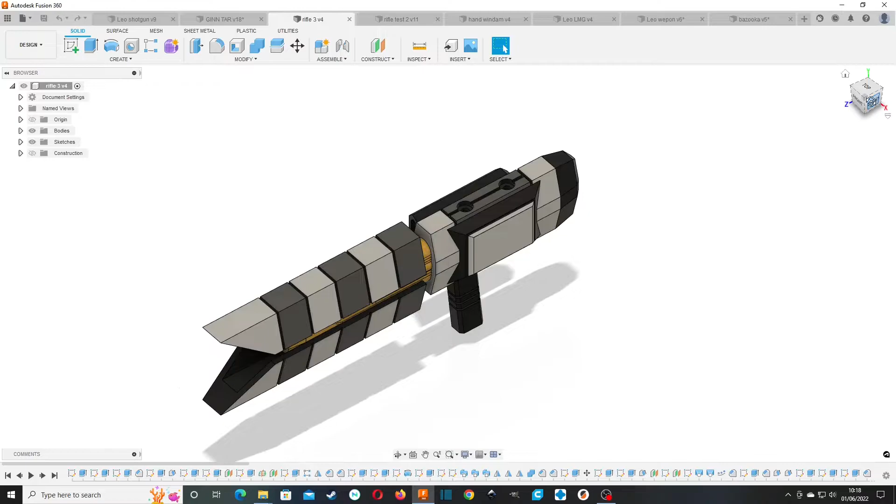Hello, my name is Stephen from K-Scale Models, and today I'm doing a video on designing 3D printable weapons for Gunpla. So, there are really three things you need to take into account when you're designing a weapon: the handle, the length here to here, so the forearm sort of length, and the overall weight. And I'll explain each of those when I go through it.

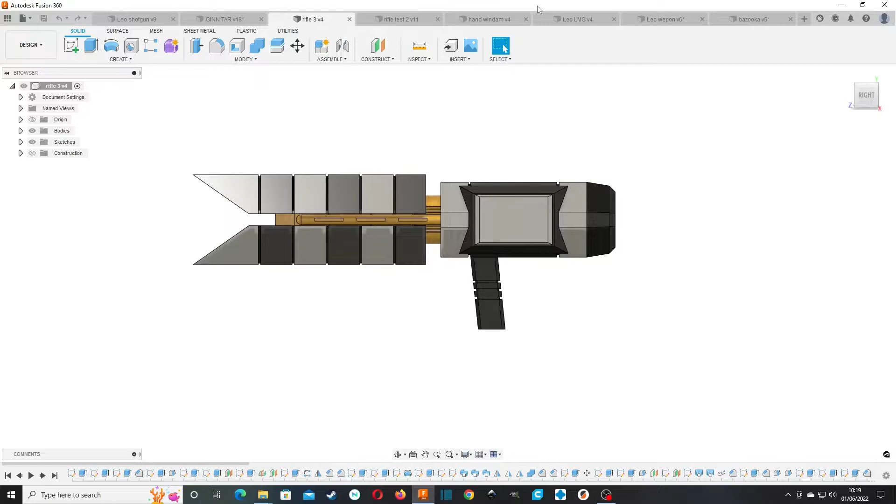So, first off, the handle. This is probably the most important bit, making sure that the weapon will fit to the kit. You'll see here on a couple of these designs that the handle is pretty much the same, and there's a reason for this. This is to fit with the current high grade line of kits. You'll find that they all basically use the same hands.

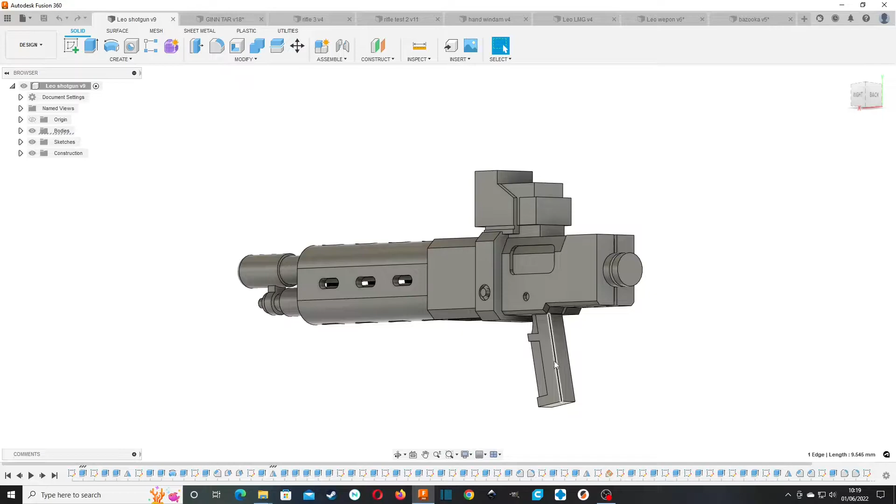So it's slightly sloped back, and, just quickly get it up here, their weapons are roughly that wide by, just reset that, yeah, by that. So if you're making a modern high grade, that is the sort of handle you're using for your weapon.

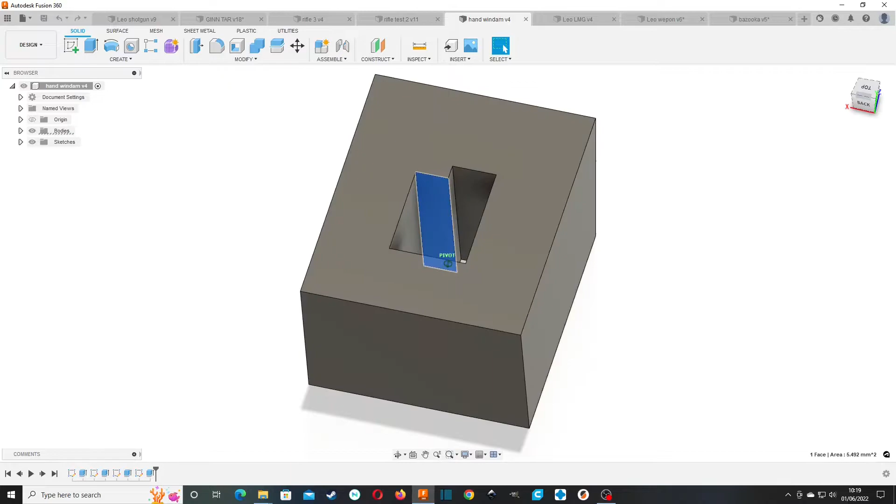So I went ahead and modeled this thing up. Now you'll notice something with it. It is not just a rectangular hole. There's actually two sections to it. There is this section, let's actually reset, there to there. There's also there to there.

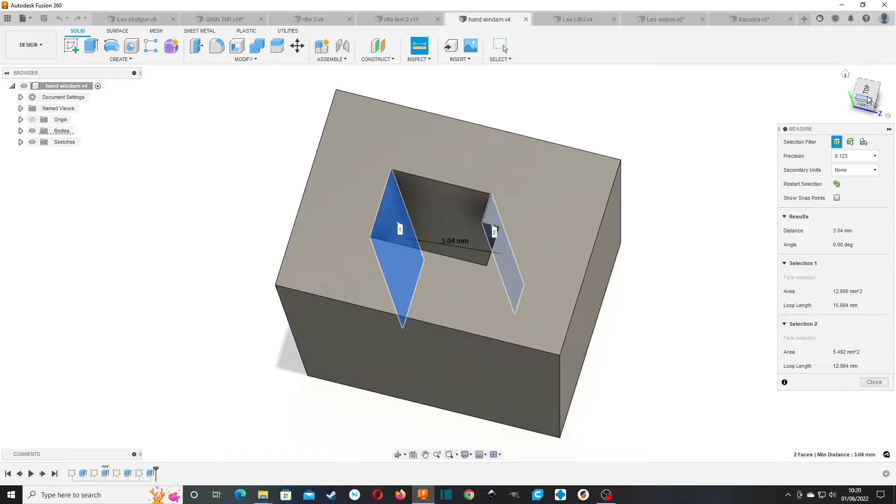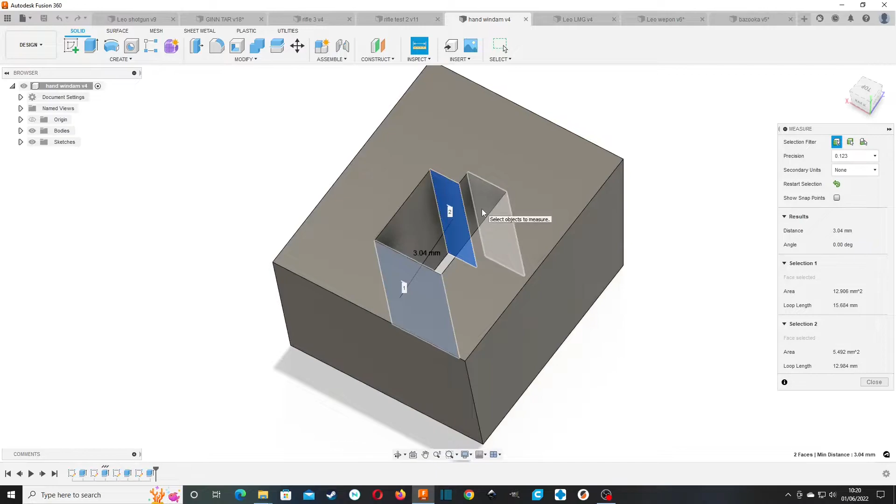So this area is a sort of squarish area, and that's for a beam saber. Beam sabers are round, they're a little wider than the rifle's handle. So that's this area. This area is for the rifle, because their handles are normally a lot longer than the beam sabers. So that is why the difference.

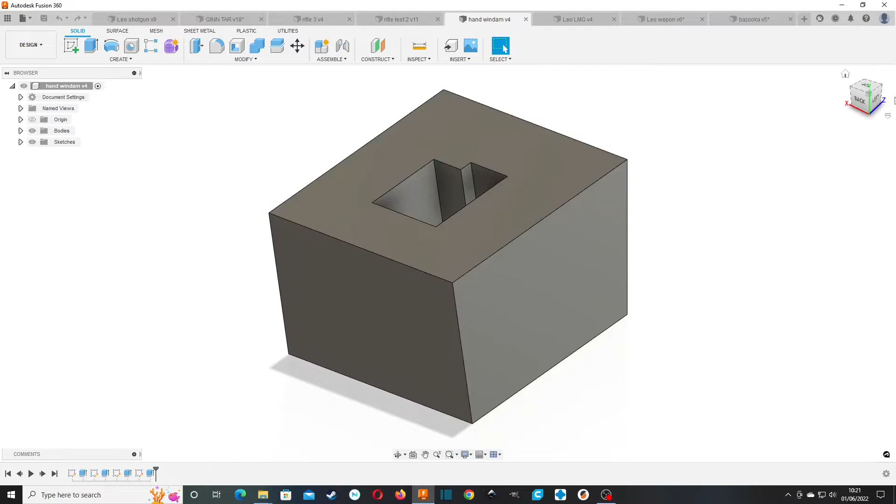Now, this particular model also gives me the distance there to there. So if I'm doing something like this, where I've got an enclosed handle area, a trigger guard, then the model will actually be able to hold it. So that's what this thing's for.

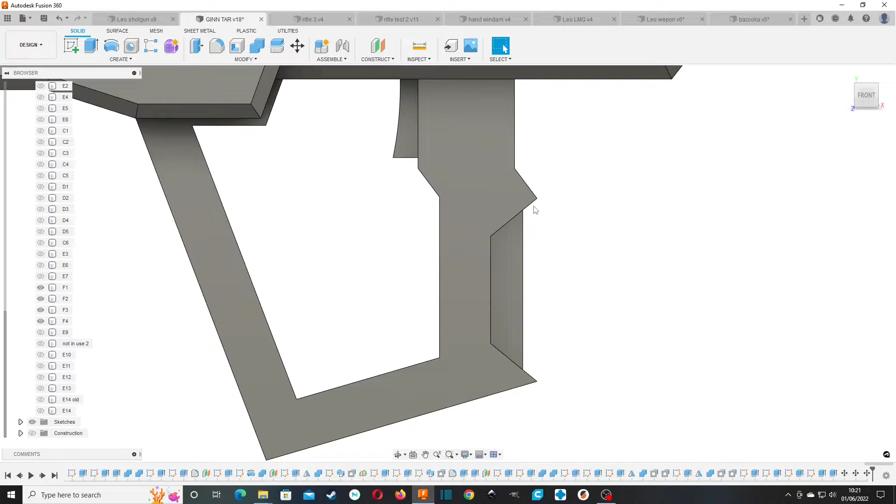Now, the thing is, this only works with the current generation of high grades. This is for the GINN, and you can see straight away this handle is pretty much straight up and down, and that's a very different shape than what you're used to. That's because it's an older kit and the hands they were using back then are much different. So when you're going to make the handle, be aware of that.

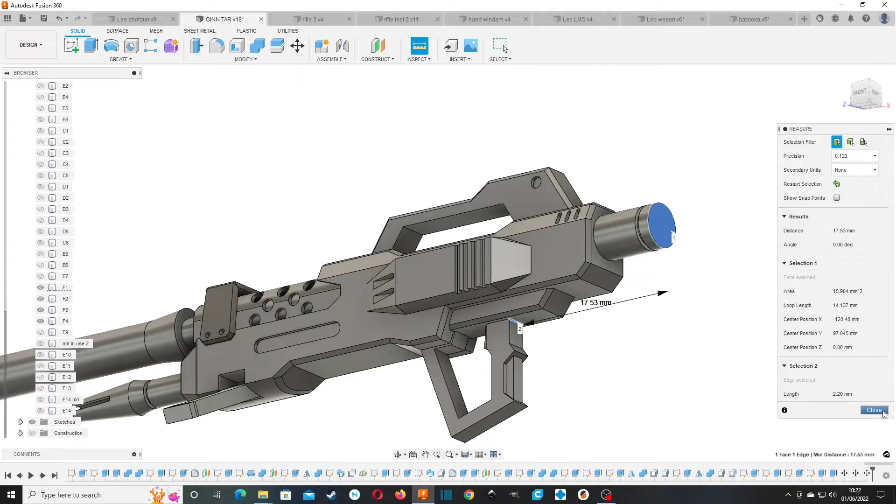Now, the next thing you need to be aware of is this distance here, here to here. In this case, it's about 17 millimeters. With this particular kit, I've checked, this thing will hold the weapon. It's gone through many revisions; you can see it's revision 18. So it's taken a few revisions to get this to the right stage. So that's something to take into account.

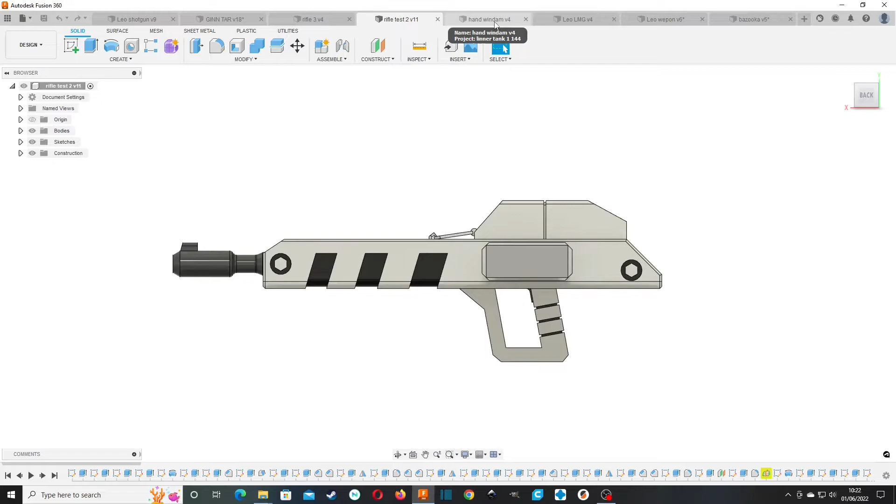Now, I suspect this is, again, standard for the current line of high-grade kits. However, I haven't really tested it, and I have noticed when designing weapons for the Leo that they have much shorter rear parts than, say, the weapons for the Windam. This is designed off the Windam's weapon, and that's where I've got some of the sizes from. So I think they're still the same length, but I would recommend checking before you print.

So the final thing that you need to take into account is the weight of the weapon. It's not just the weight, it's also the weight distribution. So if the weight is too far forward, this will put a load on this area.

So simple physics: the further the weight is along an object, or the further it is away, the heavier it will be and the more force it will exert on the object. So that means that this is where the wrist is going to be. This is one of the movement articulation points and most likely to droop. So this ideally would be over there.

Now, it is very rare to be able to do this, to get this center of mass, which is the sort of pivot point, over that. And to be honest, you will probably never be able to do that with something this small. What you'd have to do to make this go further back is increase the mass here. So you'd have to put more here, like a sight or something else, like an ammo. You might want to move the ammo from here up to here or something. That's another way of moving this center of mass back. So that's something to consider.

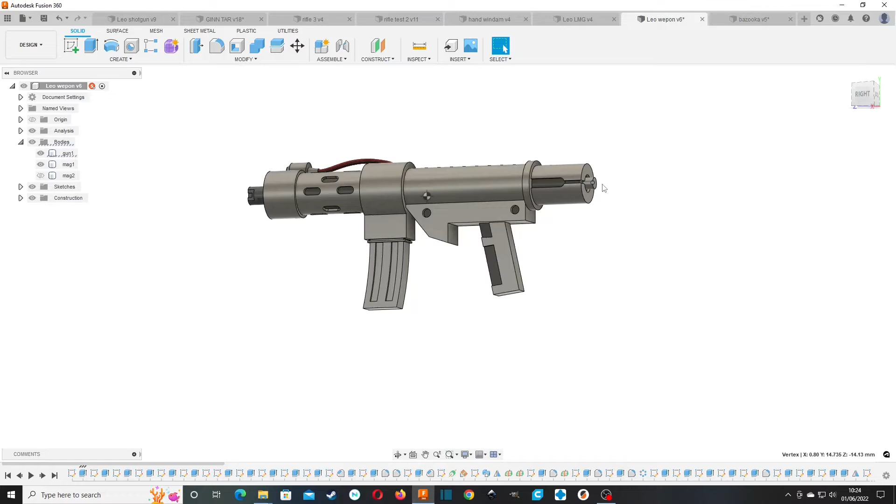The next thing is the elbow joint. Now, remember why I said there to there is important? That's because this is the length of the forearm, and if you go over this, you'll start to hit the upper arm when you've got the gun at 90 degrees held in the suit's arm or hand. So you can't really go any further back, and this is where the elbow is going to be. So you can get into a situation where you're finely balanced for the actual wrist, but the weapon is so heavy that the elbow joint can't support the weight.

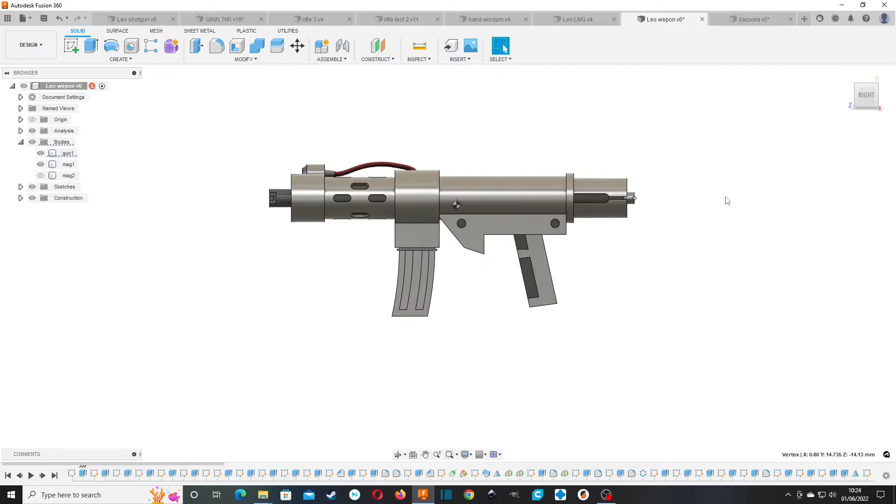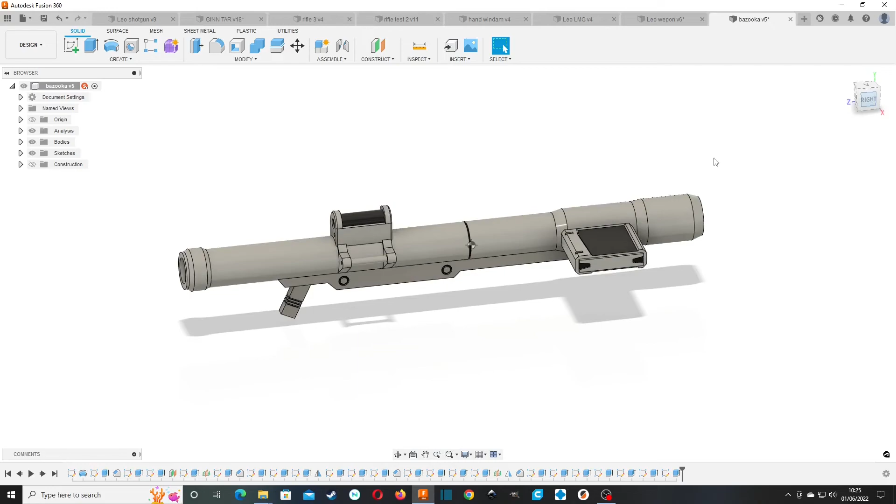Now, I did not plan for that center of mass to be there. This is a happy accident. I was just going through my models, finding an example of a rocket launcher that would do, and this popped up and it worked. So, yeah, the shoulder in this particular case is the new sort of pivot joint. If it's too far forward, this is going to droop. If it's too far back, you'll be shooting birds in the sky. You won't be shooting anything in front of you. So, yeah, that is the basics that you'll need to do when you're designing a weapon.